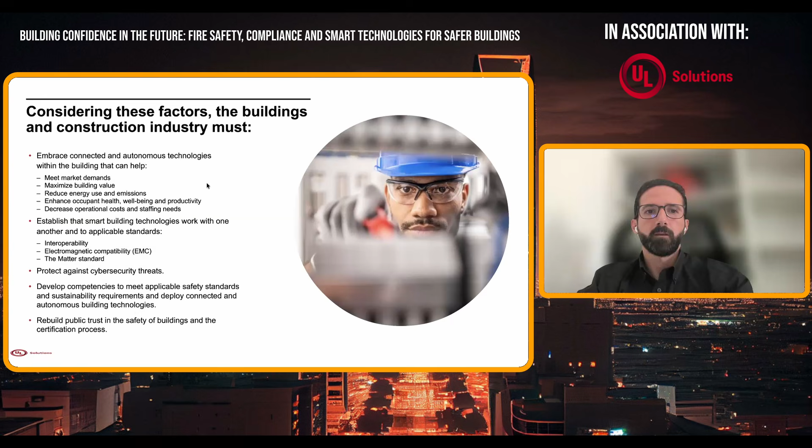So what must the industry do, given these challenges? The building and construction industry must respond in several ways. Stakeholders also must maintain compliance with the increasingly complex requirements for safety, quality, performance and efficiency. They must keep pace with occupants' expectations and sustainability goals, and they must also demonstrate that building product claims are accurate and supported by evidence.

Designers, specifiers, and owners also need to identify compliant products at early stages, because product selection can have major implications for safety, cost, project delays, and risks.

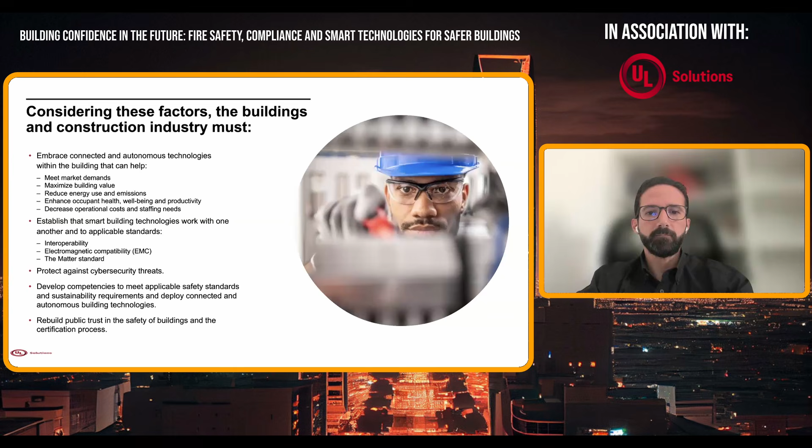So let's now move to the first main pillar, which is safer building products and systems. This section focuses on products and technical systems installed inside buildings that directly influence safety, performance, energy efficiency, and compliance.

The challenge here for manufacturers, architects, engineers, and other construction professionals is to establish that the products and systems they develop, approve, or install comply with recognized safety requirements, building codes, industry specifications, energy efficiency requirements, and performance specifications. This is not always simple, because requirements differ by country, by region, and by project type or application. Also, standards evolve, codes get updated, and product innovation often moves faster than the regulatory environment.

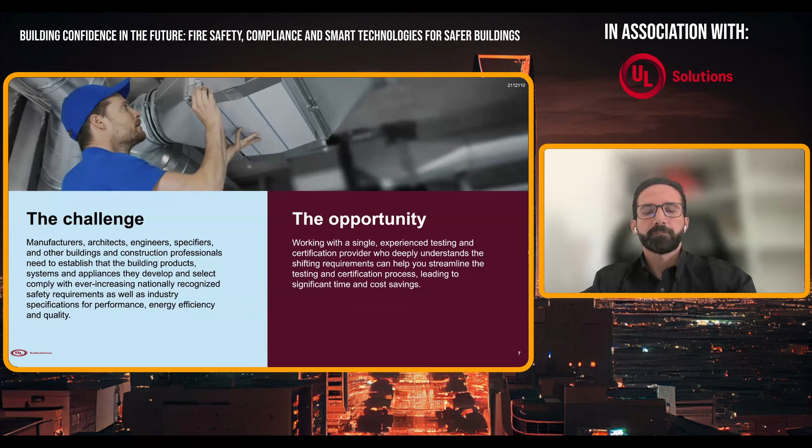So working with an experienced testing and certification partner can help streamline the process and reduce duplication, providing a more efficient route to compliance.

UL Solutions provides testing and certification services to help demonstrate compliance with applicable building codes, regulations, and standards. The services cover a broad range of building products and systems, including HVAC equipment, lighting, emergency lighting, commercial appliances, building wire and cable, and energy storage systems. The common theme is the need to evaluate safety, performance, energy efficiency, and quality before products are installed or accepted in the market.

HVAC systems are also critical to building comfort, energy performance, and occupant well-being. From a compliance perspective, equipment may need to meet safety, performance, and energy efficiency requirements across multiple jurisdictions.

This presentation highlights testing against programs and requirements such as AHRI, Energy Star, IEC standards, US Department of Energy requirements, California Energy Commission requirements, Natural Resources Canada, and Kuwait Ministry of Electricity and Water requirements, and other global frameworks, giving confidence that selected systems perform safely and efficiently.

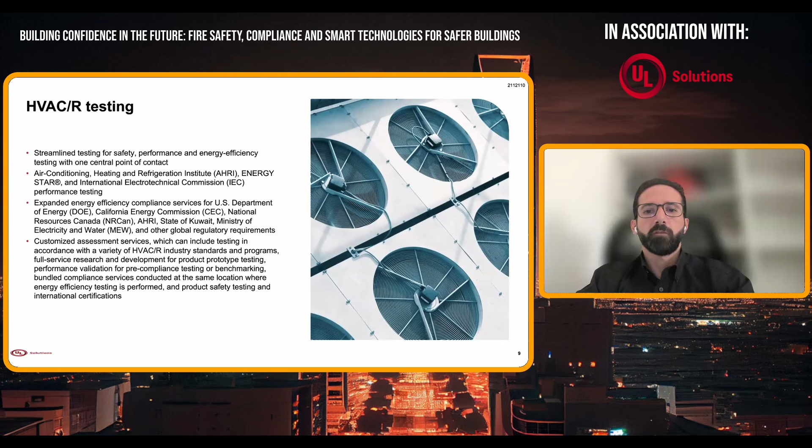Lighting products are also more advanced than ever, with LED technology, connected controls, emergency functions, and integration into smart building platforms. Safety testing helps identify issues at early stages and avoid late production problems, reducing recall risks and navigating complex certification requirements. The UL Mark is widely recognized, and it helps designers, authorities, and end users identify products that have been independently evaluated.

Emergency lighting and exit systems play a direct role in life safety. During fire, smoke migration, or power failure, occupants need visible, reliable, and code-compliant means of egress. Testing and certification helps evaluate risks such as fire and electrical shock, and verifies that equipment will perform when needed. Examples include UL 924 for emergency lighting and power equipment, UL 924A for emergency signs with alternative visual designs, and UL 1994 for luminous path marking materials.

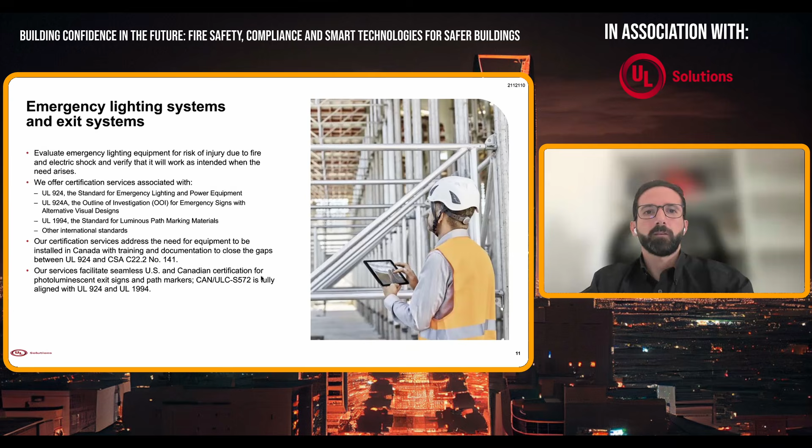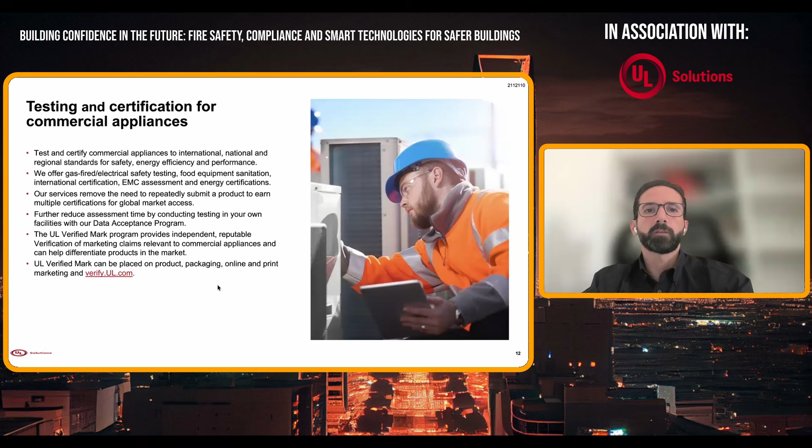Commercial appliances are used in hotels, restaurants, retail spaces, and many other facilities. These products may involve electrical safety, gas-fired safety, sanitation, EMC, and energy efficiency and performance. Testing and certification can reduce repeated submissions and support wider market access, and verification programs can also demonstrate marketing claims and differentiate products in competitive markets.

Wire and cable are a fundamental component in every building, and non-compliant or poor quality cables can increase risks related to fire propagation, electrical faults, smoke generation, and system failure. Testing helps demonstrate compliance with safety standards and performance specifications, and supports supply chain confidence by helping stakeholders identify compliant products and reduce the likelihood of inferior products entering projects.

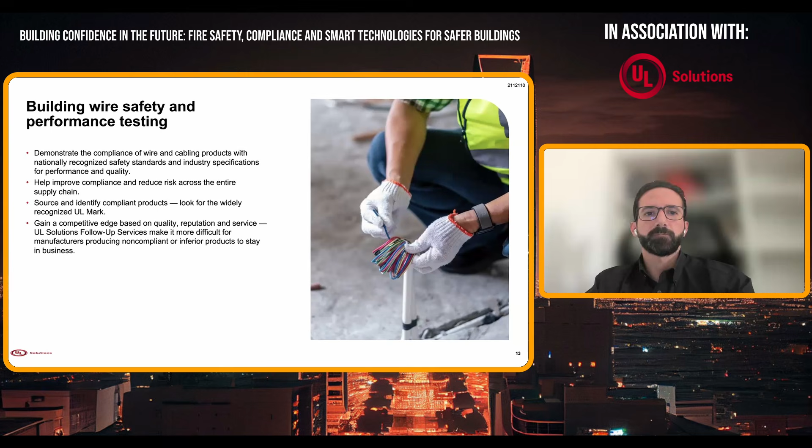For projects involved in the European Union or United Kingdom markets, the Construction Products Regulation, or CPR, is highly relevant for cables. CPR provides unified requirements for reaction to fire performance for power, control, communication, and optical fiber cables in construction works. Testing and certification can support applicable market access markings and help manufacturers demonstrate that cable products meet relevant fire performance classifications.

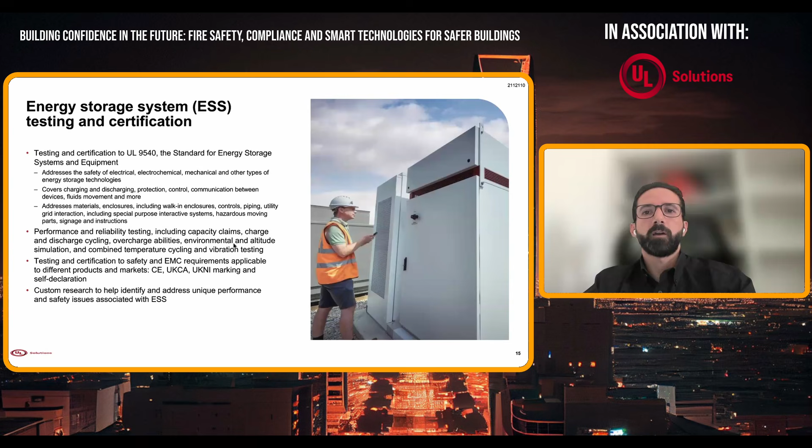Energy storage systems are also increasingly important in modern buildings and infrastructure, microgrids, and backup power applications. However, they also introduce safety considerations related to electrical energy, electrochemical performance, thermal events, and ventilation issues. Testing and certification to UL 9540 address safety requirements for energy storage systems and equipment. As more facilities adopt battery energy storage, careful attention is needed for product safety, installation standards, fire protection strategies, emergency response planning, and system-level risk assessment.

We now move from individual products to building infrastructure itself. Here the focus is on how complete systems and assemblies perform together under fire, environmental, and operational stresses. Construction is also changing through 3D printed materials, engineered timber, and modular methods. These approaches can provide real benefits, but they also require codes, test methods, and professional knowledge to keep pace. At the same time, facades and structural systems face more demanding environmental conditions and greater public analysis, so the key challenge is to support innovation while maintaining evidence-based confidence in fire performance, durability, transparency, and code compliance.

The opportunity here is to evaluate innovative systems before risks become costly project issues. Through code compliance support, fire safety testing, envelope testing, inspection, and training, UL Solutions can help manufacturers and project teams understand the evolving requirements and demonstrate that building systems and assemblies perform as intended.

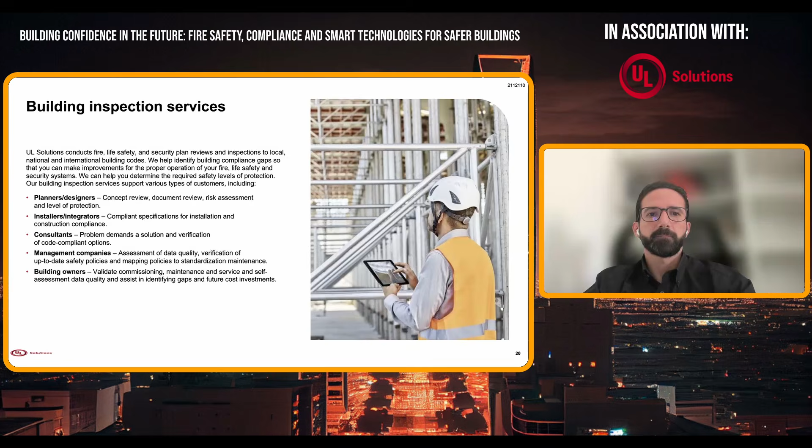Modular construction also shifts a significant part of the work from the final site to the factory, which improves repeatability, but also means critical systems may be concealed before the modular unit arrives on site. So inspection needs to occur during manufacturing, and the process can include plan review, factory inspection, a certificate for each unit, and where requested, an installation site review. This gives architects, manufacturers, owners, and code officials greater confidence that fire, electrical, mechanical, and plumbing systems meet applicable requirements.

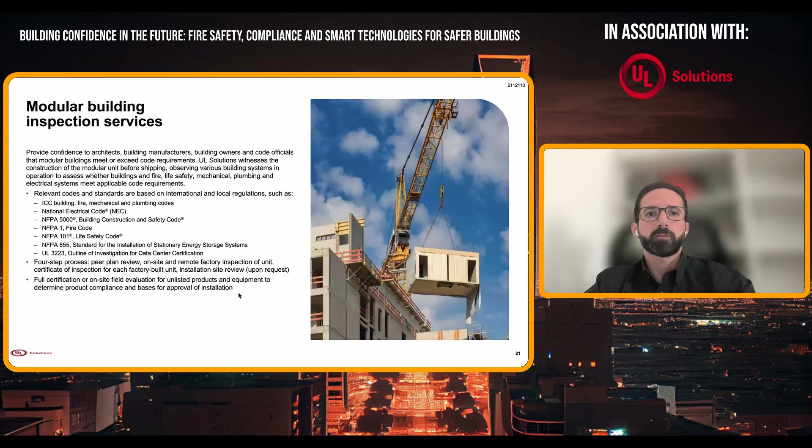The building envelope must also manage wind, rain, and major temperature changes while supporting energy performance and occupant comfort. Lab and field testing can simulate wind-driven rain, hurricane or tornado conditions, and extreme temperatures. That helps teams select suitable systems and identify weaknesses before or during construction, when corrective action is generally more practical and less costly.

Windows, doors, and other fenestration products affect weather tightness, air leakage, thermal performance, structural resistance, security, and durability. Testing and modeling before final installation help verify performance against relevant standards and project conditions. For designers and owners, this provides objective evidence that the selected materials are suitable for the intended building and environment.

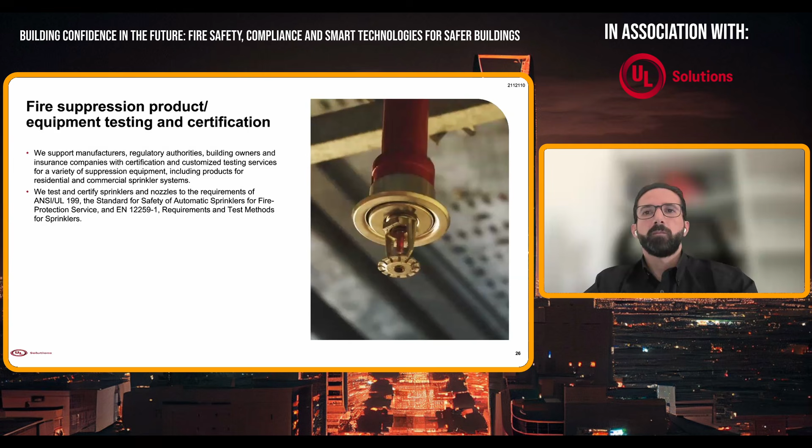Suppression equipment is another critical line of defense. Testing and certification cover products such as sprinklers and nozzles for both residential and commercial systems. Evaluation to standards such as UL 199 and EN 12259-1 helps demonstrate that these products meet defined operating and performance requirements, supporting manufacturers, authorities, owners, and insurers in making evidence-based decisions.

Code authorities also need timely technical information as products and installation methods evolve. Dedicated resources, training, events, and access to technical experts can help authorities understand requirements, resolve installation questions, and approve safer, sustainable, and code-compliant solutions.

Safety also depends on the people performing the work. Digital construction safety courses can help employers manage health and safety risks more consistently. The curriculum covers more than 50 topics, ranging from crane safety to heat stress, and supports scalable learning across project teams.

The third pillar is smart and secure building technology. As fire, security, lighting, HVAC, and other systems become connected, physical safety and digital security increasingly depend on each other. These connected systems can improve comfort, energy efficiency, maintenance, and emergency response, but they also create interoperability problems, EMC issues, cybersecurity vulnerabilities, and privacy concerns.

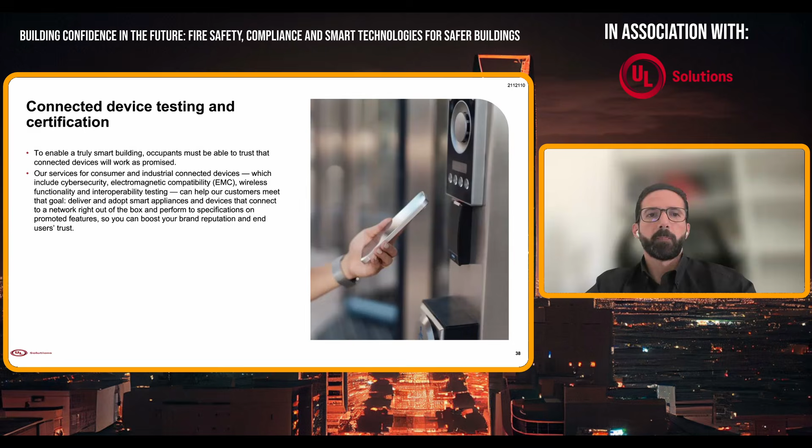Controls are the decision-making layer of building automation. Evaluation can address electrical safety, energy management equipment, sensors, cloud-connected controls, functional safety, performance, software updates, and marketing claims. This becomes increasingly important as control logic moves to the cloud or the edge, and as artificial intelligence is introduced into building operations.

Connected lighting is moving beyond illumination toward lighting as a service and as a source of building data. That creates new requirements around cybersecurity, interoperability, and wireless performance. Testing against protocols such as DALI2, Bluetooth, Zigbee, and Thread can help demonstrate that lighting products work within the connected ecosystem.

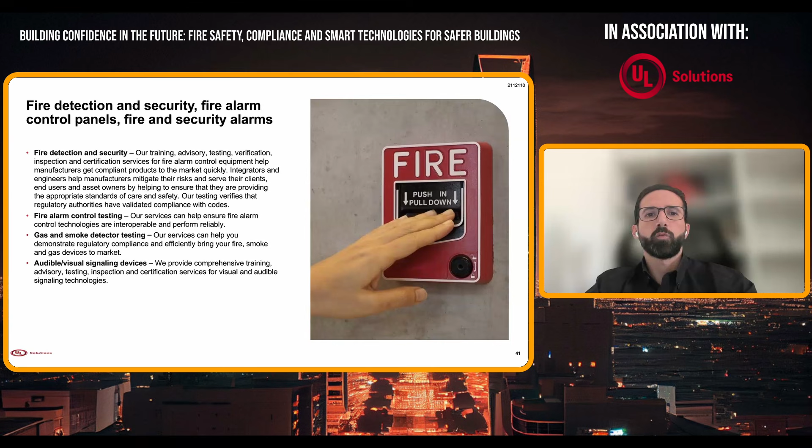For fire detection and security systems, reliable integration is essential. Services cover fire alarm control equipment, smoke and gas detectors, and audible and visual signaling devices. Testing helps verify regulatory compliance, interoperability, and dependable performance. For manufacturers and integrators, this supports market access. And for authorities or asset owners, it provides greater confidence that systems will deliver the intended warning and control functions during an emergency.

Let's now look at three examples that show how independent assessments can help solve practical building and fire safety challenges.

Intermountain Electronics needed to scale production of modular data centers, energy storage buildings, and other specialized units, while maintaining accountability. A two-stage review, first at the conceptual stage and then at a final plan review, helped identify issues at the factory rather than at the destination. The result was a more proactive process that supported faster adaptation to customer needs and reduced schedule and delivery risks.

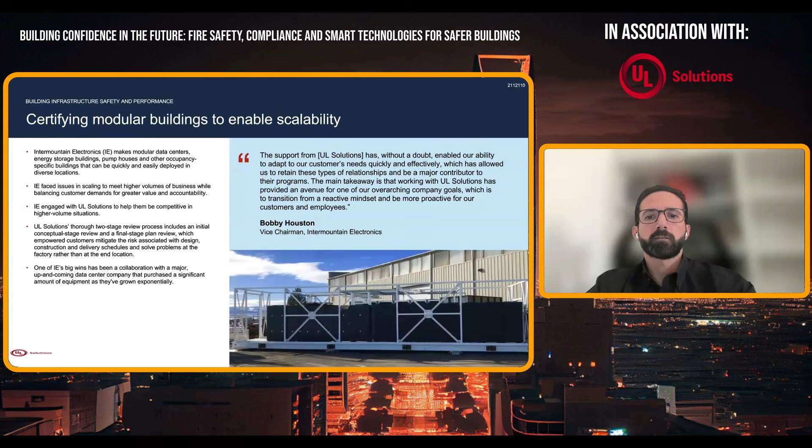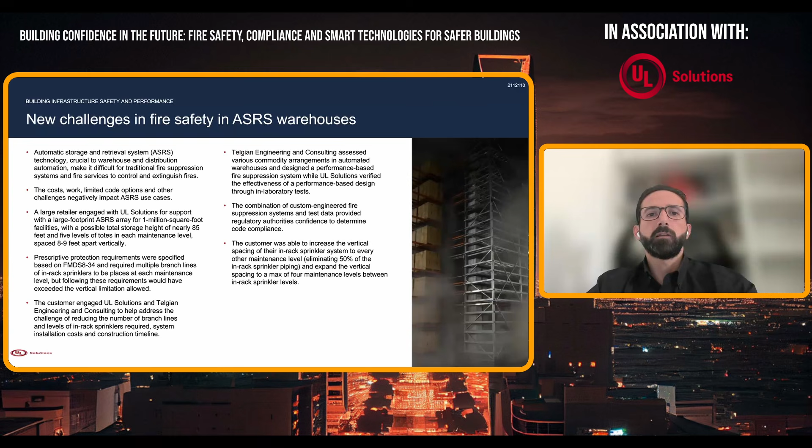Automated storage and retrieval systems can challenge traditional fire suppression designs because of their height, density, and limited access. In this case, prescriptive fire protection would have required extensive in-rack sprinkler piping, but a performance-based design was developed and verified with lab testing. The evidence gave the authority confidence to consider that the solution has significant reduction in in-rack sprinkler piping, illustrating how engineering analysis and physical testing can work together when innovative layouts do not fit neatly with prescriptive options.

The third example is the application of Spire assessment across Microsoft buildings in several countries. We conducted on-site and virtual assessments examining six smart building criteria, providing a structured platform for understanding operations, connected technologies, and improvement opportunities. The value was not simply a rating, but a consistent way to plan for upgrades, monitor progress, mitigate risk, and share insights across a diverse property portfolio.

To close, I would like to summarize why independent applied safety science can support the advancement of building technology and construction. UL Solutions has worked within the building and construction industry for many years, helping safeguard living and working environments since 1894. That history is combined with technical expertise, extensive resources, and a trusted reputation among manufacturers, designers, owners, and authorities.